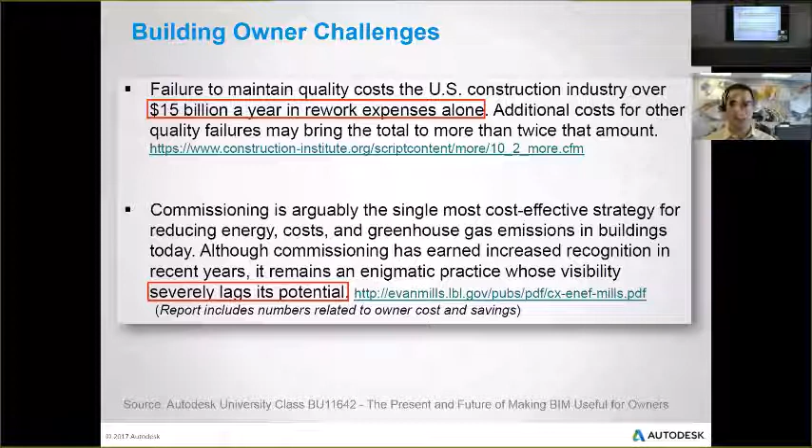And the other challenge is managing commissioning. Commissioning is arguably the single most cost-effective strategy for reducing energy and for efficient operation of facilities, but it's still lagging on its potential, and there are challenges in managing commissioning.

In a traditional building life cycle and implementation of BIM throughout the construction and building delivery life cycle, from design to construction to handover into operation, basically what ends up happening is the designer and consulting team use BIM to generate the design, and the construction team uses the model to run coordination and other construction-related activities.

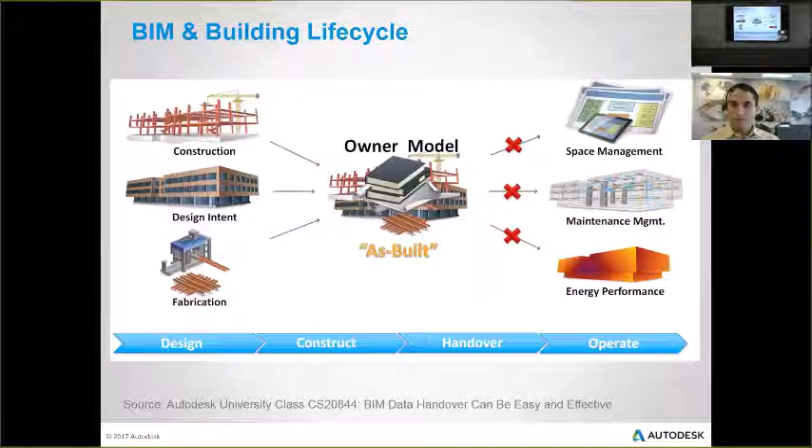But when we get to the as-built and the handover of the design and the documentation of the design, the challenge is always with how the as-built could be used for the operation team and space management, maintenance management, energy efficiency. So the key here is in the data, the attribute data.

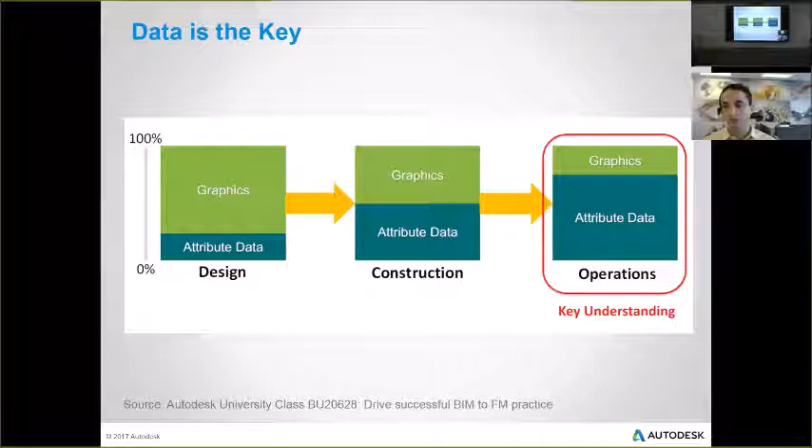So basically, during the design phase, the major focus of the consulting team and the engineers is more on the graphic representation of the design, with minimal attention to the data. When we move to construction, especially quantity takeoff, estimation, submittals and other activities, attribute data becomes important for the construction team. But really, the data is mostly important for the operation team, and that's what's really important to focus on.

So there are many BIM standards out there that would help owners set up standards for the data and how data could be delivered for them, some from the Army Corps of Engineers, the Construction Institute or GSA. Data could be specified by owners, including the document format and how the commissioning documentation is delivered for asset attributes. I watched the last 15 minutes of Brian's presentation; he was talking about COBie, MasterFormat, UniFormat, and other data that should be delivered for the assets.

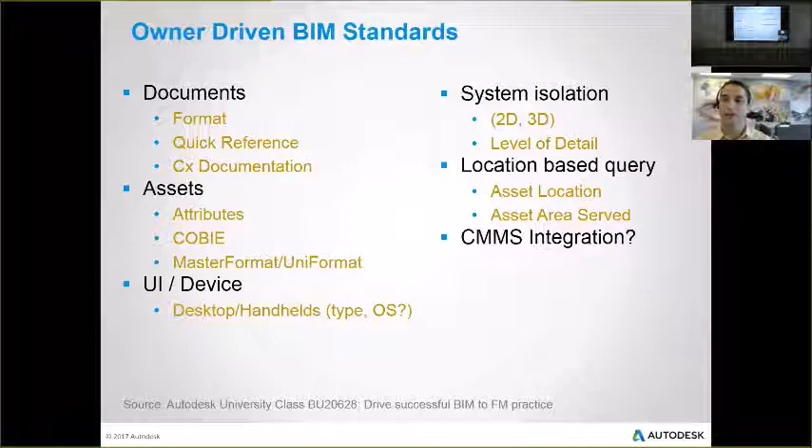Also, whatever user interface and devices could be used to view the BIM data, how systems could be isolated in 2D and 3D, and what level of detail could be specified with the BIM standards. And what's really important here is to monitor and manage the data collection process from the design phase, making sure that data specified in the BIM standard is collected and audited throughout the life cycle of the project, from design to construction to operation.

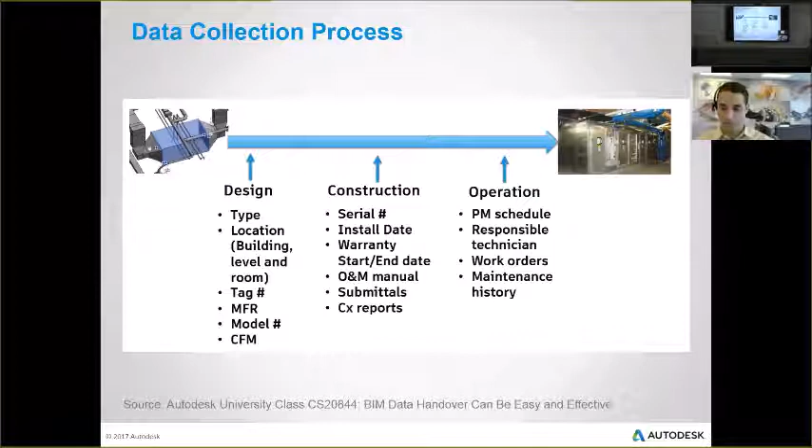Regarding Autodesk, Autodesk offers multiple workflows that could help owners manage this attribute data in different stages. Our design authoring tools like Revit and AutoCAD provide the ability to input data into the design. When we move to construction, our BIM 360 cloud solution, in addition to Navisworks, allows us to input more data and documentation into the as-built data, and this data could all be funneled into our Building Ops solution that could help the operation team.

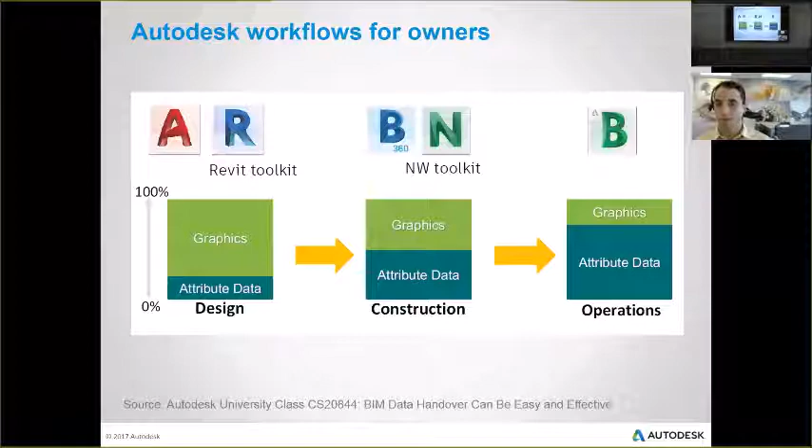Speaking of our BIM 360 solution, it's a collection of products that span the stages of the project, from BIM 360 Glue, used as a coordination tool where models are exported from our authoring tools to the cloud and the model data accessed in Glue. That data could be used in products like Layout for detailed construction execution, pushed into Field for quality assurance and the commissioning process, and then pushed to Building Ops.

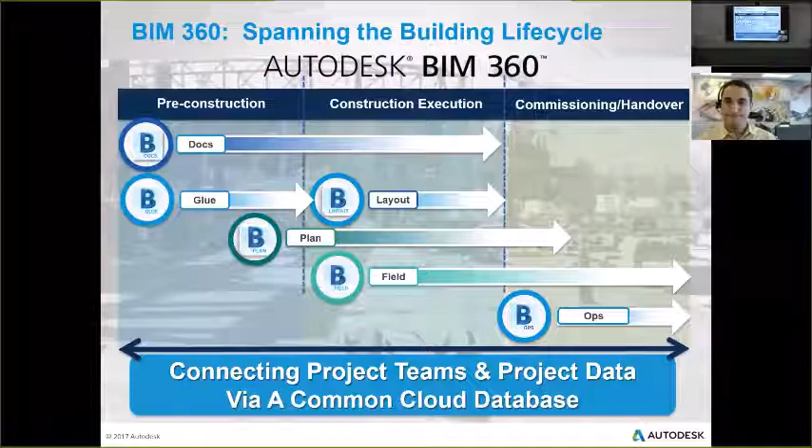So, generally speaking, our BIM 360 solutions allow access anytime, anywhere, from mobile to the web interface, without an extensive need for deployment or installation, and only a minimal amount of training would be required to implement such a product, especially at the owner or operation level, where they're probably not used to our design authoring tools like Revit.

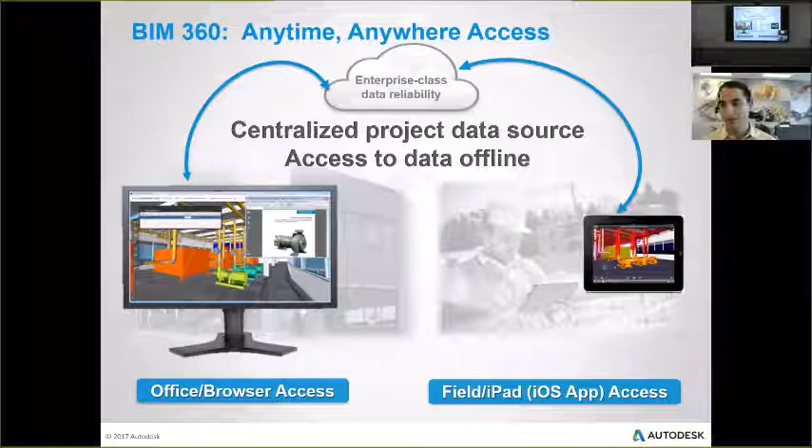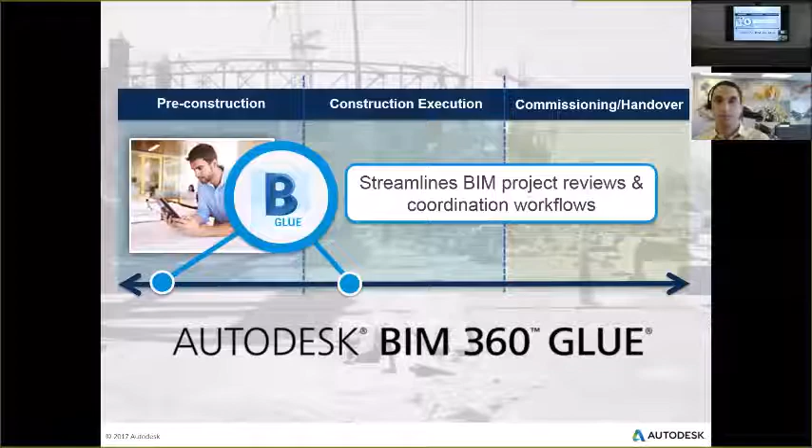So our BIM 360 Glue solution works between the pre-construction and construction execution phases of the project, where all models are exported to the cloud, and the project team can coordinate, collaborate, resolve clashes and mark up. And here the owners could be part of that process, have a look at the design, provide markups in the tool, and share that with the project team.

So basically, it extends BIM model access to the entire project team, allows for easy coordination, and also connects that data to the field, where field personnel can look at the model in real time.

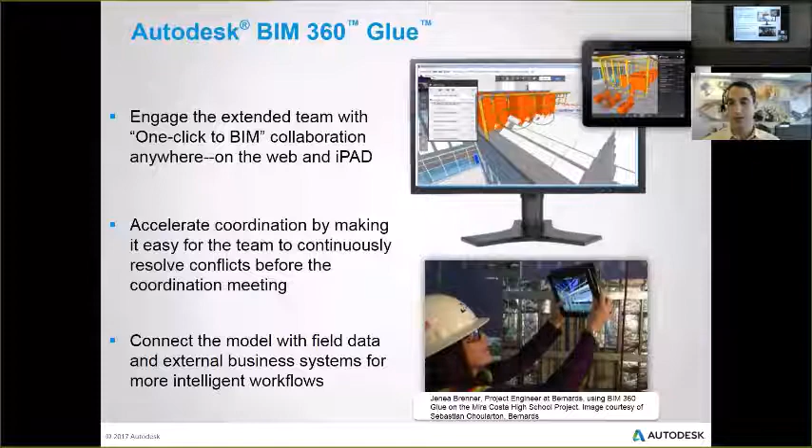Our BIM 360 Field solution allows the management of the construction data, from the construction phase all the way to the commissioning phase. Basically, we can run our QA/QC processes through BIM 360 Field. We can run our safety processes. If there's any safety program within the owner organization, it definitely can be implemented here.

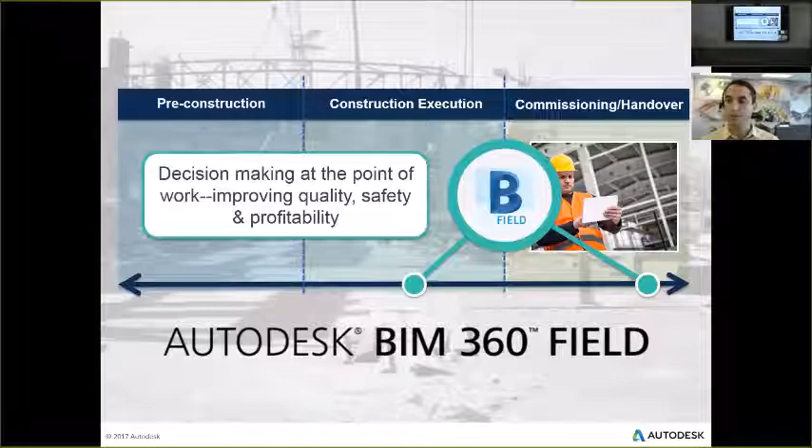Also, we can run our commissioning processes, develop commissioning templates, assign them to individuals and make sure they're implemented. It also allows the field personnel to access the model data and link the safety and quality data directly to the model.

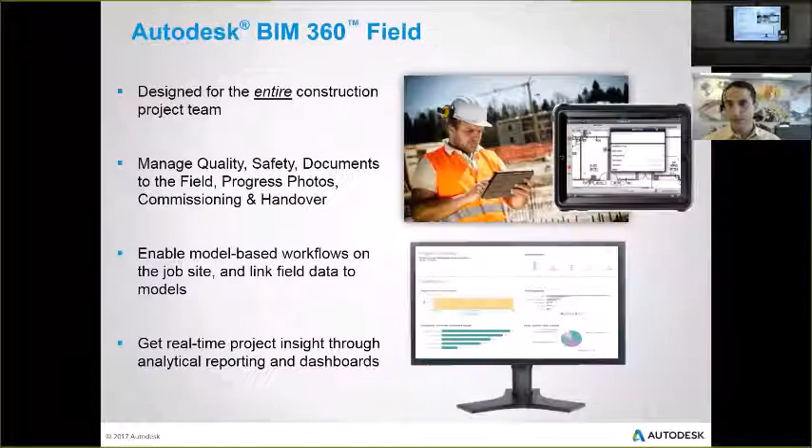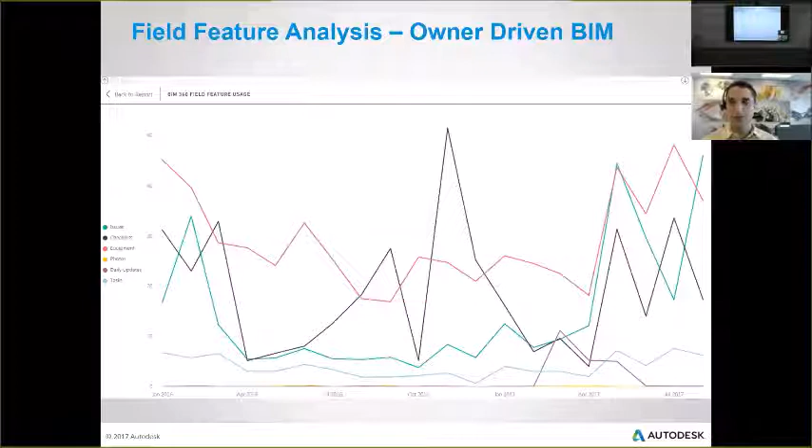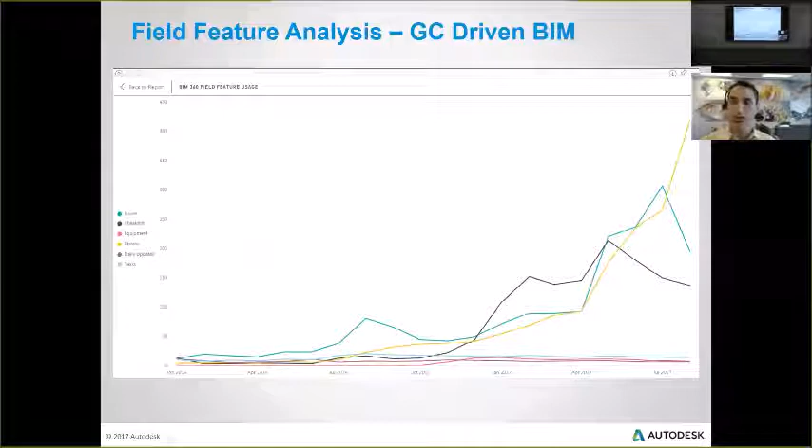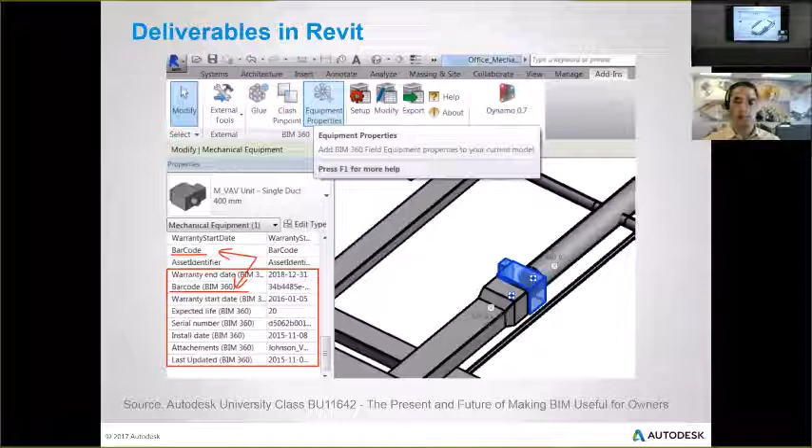In terms of when the project ends, when commissioning starts and the data is delivered to the owners, Field allows several ways to deliver this data. You can simply export the data to Excel. You can push the data to the authoring tool like Revit and hand over the Revit model with the data in it. We can take it to Navisworks and hand over the data in Navisworks, or we can export the data to our Building Ops solution.

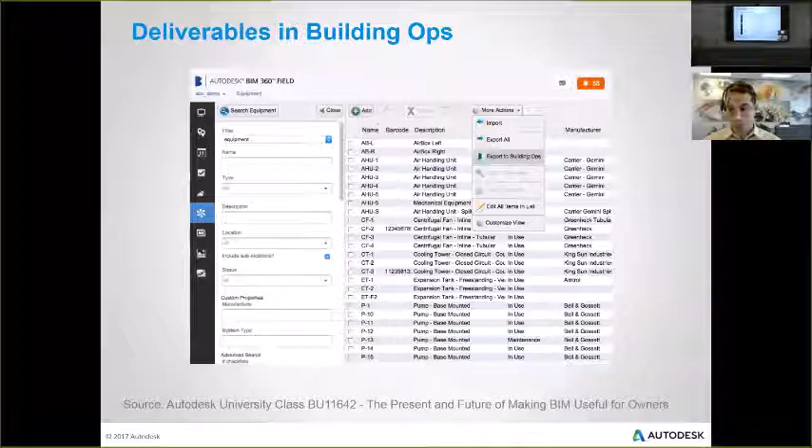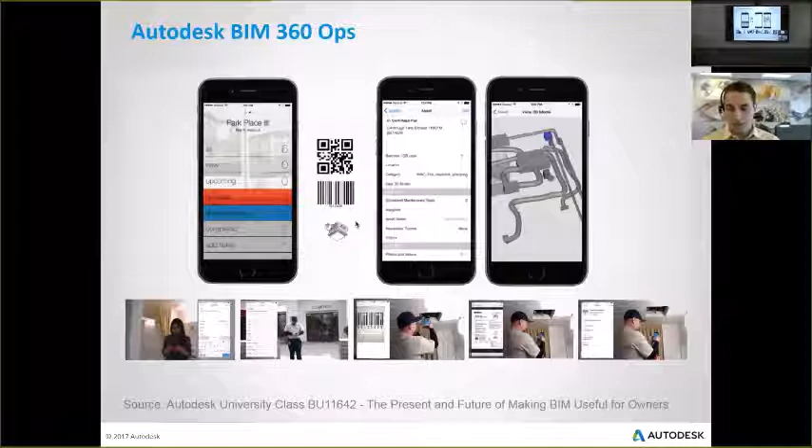Building Ops is our cloud solution that helps the operation and maintenance team. With the Building Ops solution, the tenants can report an issue, and the maintenance personnel get notified and walk to the unit. Of course, if barcode or QR code is implemented through Field, with a scan of the barcode, the maintenance personnel will be able to extract the data, see the data on the model, see the information. The data that could come from Field is quite extensive and would include photos, asset-related information, and other information.

This is really it for me. I wanted to have a quick presentation; I didn't want to take so much of your time. I'd like to open the mic for questions if you have any.

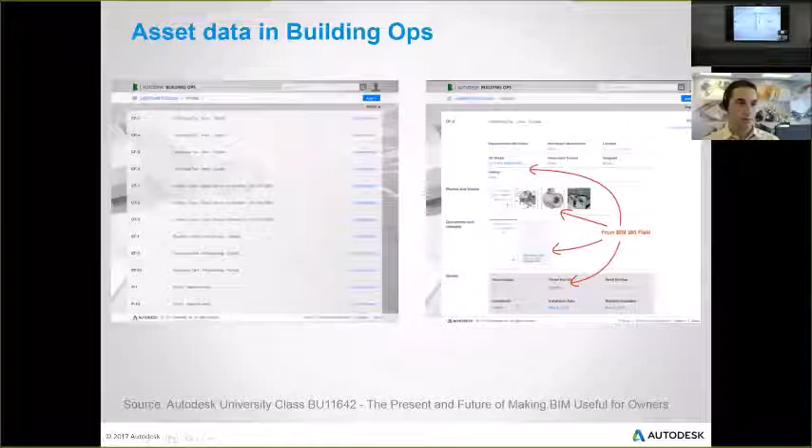It's more comments. So until now, we are mainly using the Field product from BIM 360, and it's pretty interesting because we are still in development mode using these tools. We need to make sure it respects our needs in terms of formatting some checklists from Field, and make sure to import our data from Glue, not 100%, but as much as we can import from Glue to Field and use this data. But of course, until now, we are able to deliver what we are asked to do. So it's pretty much a good tool for us.

Yes, we have BIM 360. We use Glue for most of our projects, and Field not only for deficiencies but also for quality and safety. We tried to use Docs and Layouts and also Building Ops, but that didn't work too well. It's just a process that is a little bit harder for Building Ops. Some visualization didn't work, but mostly we are also trying to use Field for commissioning. So we are starting to do that as well.